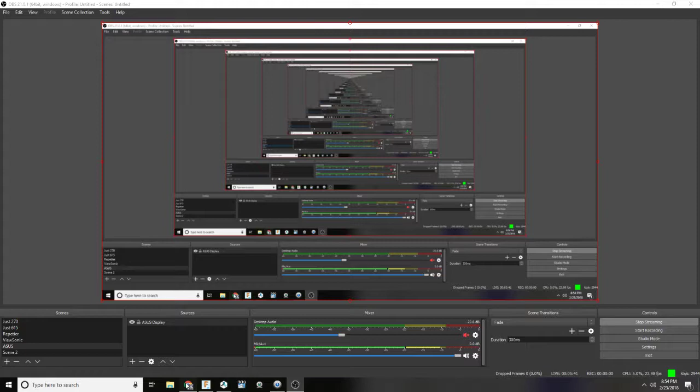So, time to go to Thingiverse. To do, where is it? That one place with the stuff and the things. And the things there. I'll do the ASUS. Oh wow, whoa no, yeah, oh trippy. Bam, okay, explore things.

We want keychain. Do do do, do do do.

Oh, piston, I like it. Oh, that's kind of cute too. And cool, and cool, and cool. Some interesting stuff. None of which... nerd.

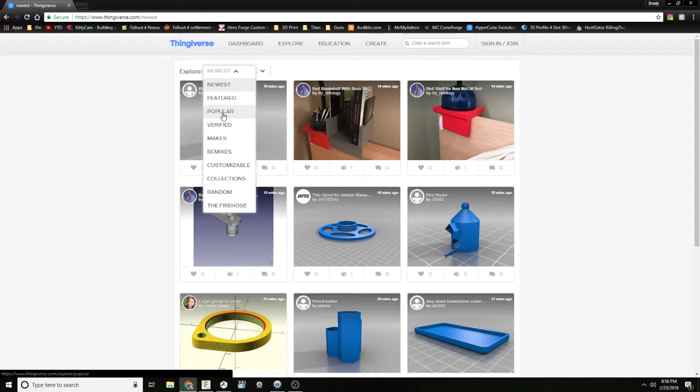Featured, no. Popular, yes. Is it the Proteus key holder? I believe it is. Yes, this is the stuff. Most definitely. I mean, I don't know about these keys specifically, but this'll do. That'll do.

Ba-da-ba-da-ba. So there, in here, that. Whoa. Whoopsie. Should have got more specifications.

Yeah. Let's extract. And well, take that. No, completely get it. And put it here. Then move down to the stuff, the things. Stuff getter is cool.

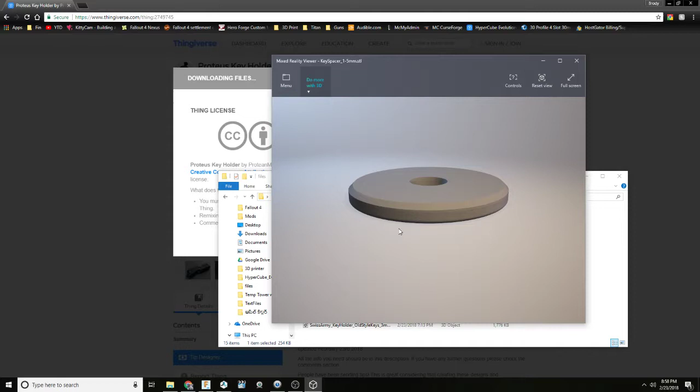And let's review. That is a spacer, hence the name spacer. Swiss Army key holder, old style. Let's see what else is going on here.

Oh. Oh, need to nix that. Disable input director. Go back to the cool bits. There's no kitty down here. And then.

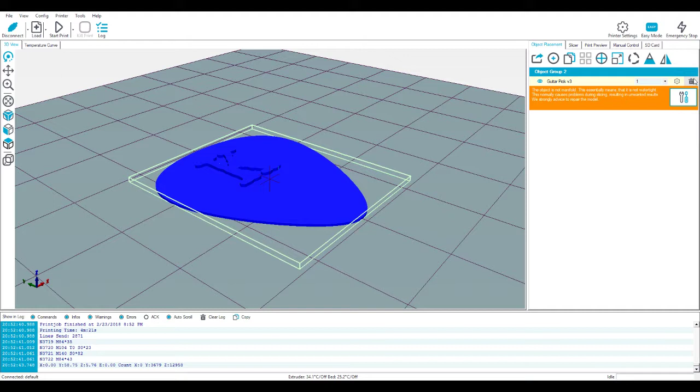So, now that we've downloaded the files, we need to place the files in the spot. Proteus key holder files.

Man. This is interesting. Top, large keyring, STL. Let's try actually perusing the files a bit.

Ooh, peruse mode. No name, thank you, okay. We don't need a spacer. Old style keys, nope, another spacer. Why do I even click?

Okay, bottom 2 mil bolt bottom knurl. Well no, I only have 3 mil, so it is what it is. It's got a little texture, pretty neat looking. I like it. The little dude, hey little dude, I'm going to print you.

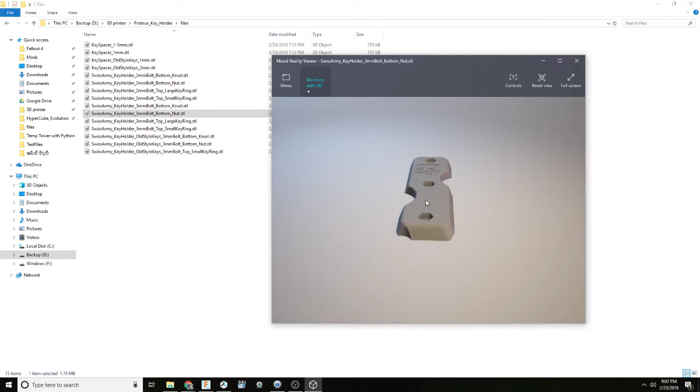Wait a minute, bottom nut. Okay, it's interesting that the part with the little dude is considered the bottom. That's not the smartest way to print this. Like, just print 2 tops and call it good. Like this, it's dumb, can't see what's going on, because of course they had to think too much about it.

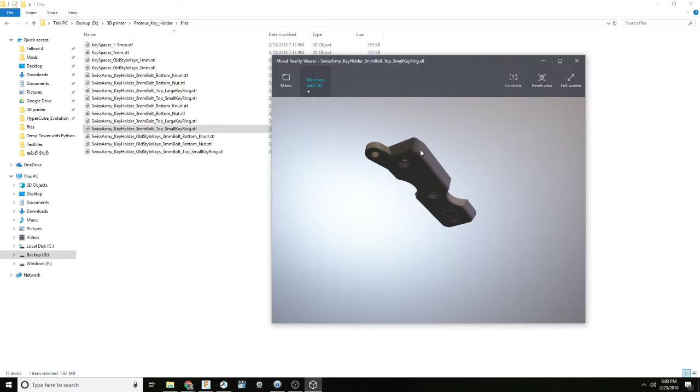So I'm going to go and flip that. Not quite sure. So I think we're just going to print the large style. Well let's see. There we go.

Back into the folder, back into the files, back into the 3mm knurl, and let's give you a friend. Whoa, large, based on assumptions, and that ain't bad. Let's see.

Let's see if we can just flip this one, or well it's gonna be twice, but the intelligent thing is to look here and see that this is the y-axis, and of course that is the axis I want to rotate on. Yay. We're going to delete you, because we want the file with the nut.

Are these two bottoms? These are two bottoms now. Okay, in that case we delete this one and add the other bit, which was top key large.

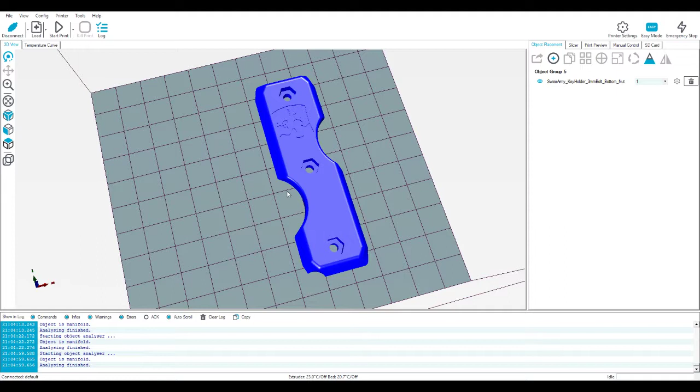Flip it along the Y. And I like that, it looks pretty good. Pretty good.

Slice it. Keel slicing, 1 hour 41 minutes.

Let's see here, I'm not viewing the chat like I should. It hurts to knock. I completely understand.

So, PK if you're watching, I don't think we discussed the part where I print this in, well, we'll just say you're getting this first one in semi-translucent purple, because that's what's ready. And that's what we're gonna do.

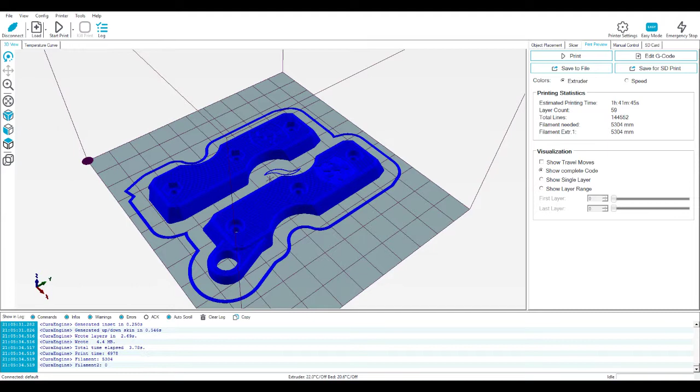Away we go. Everything look good here? I think so. Sliced in 1mm. Yeah, I got good feelings about this. I do.

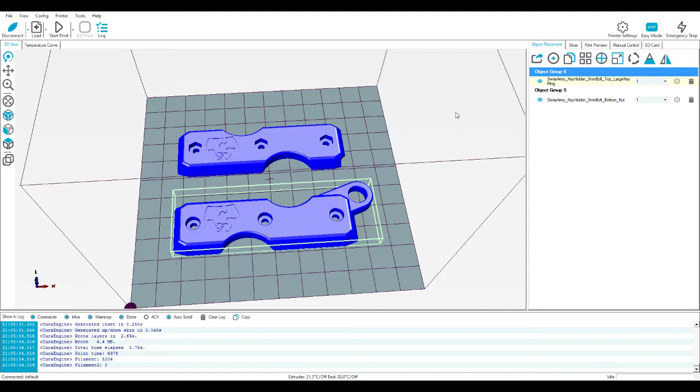We're going to do one thing though. I'm going to rotate these on Z. Do it. Yeah. Cool, alright, slice it one more time.

Infill, we don't need 40%, we're gonna cut that back to 20. That'll give us some better time too. Yeah, 127, that's a little better. Yep.

We are making the Proteus key thingy. Whoa, whoa. No, where'd you go? Whoa, yeah. This guy.

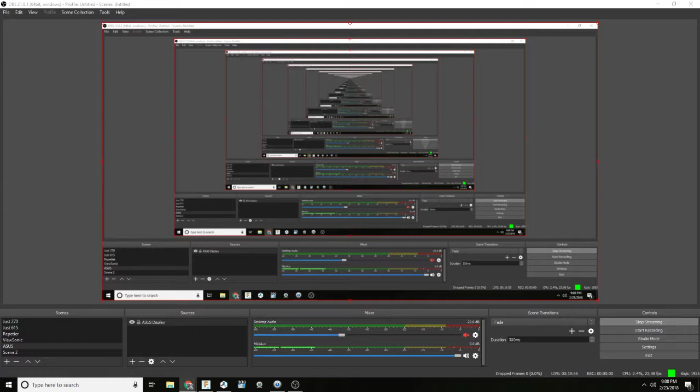Yeah, I think it looks pretty cool. I'll have to print a couple of these. I don't know if I'm going to print any keys. I like that they used the texture stuff, the lighting. Pretty crazy.

And back to the show. Oh.

Alright, bed is heating. Let's get a proper angle.

And some interesting dead space over there. And chat box. Screenception, absolutely.

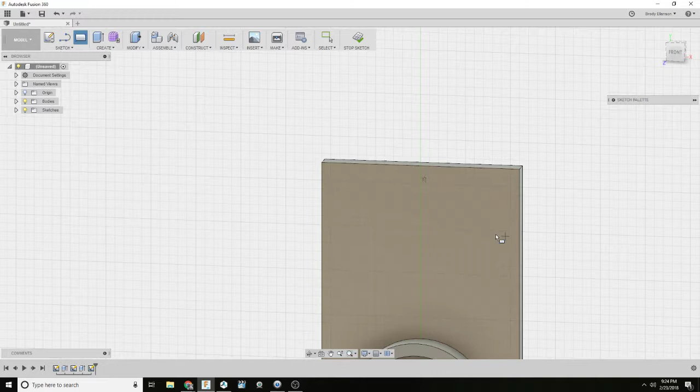And another rectangle, this time instead of going on a plane, we're going on a face. As Lars Christensen would say, you either have to be on a face or a plane. Yippers. So, what the heck, 22 by 5. Not 85, wow, not 8, 5.

And once again, we extrude. I'm gonna go 5, why not? I'm gonna go 7, why not? Yeah, that's the stuff.

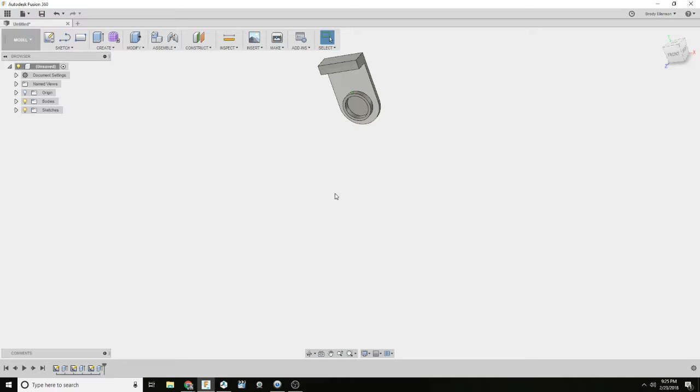And we're gonna go, whoa man. Whoa man. Whoa, okay. That was cool. I need to actually make this a little bigger, because yeah.

My intention is to put this inside a piece of PVC and glue it in place. I also want to give this a little something something.

So let us make a line using this face, and we're gonna go like so, and that's it. Now I'm gonna do this, I'm gonna push pull, I'm gonna go the wrong direction, and I want this to go to an object. I'm going to just select the opposite side, make sure it's cutting, click OK, and now I have this

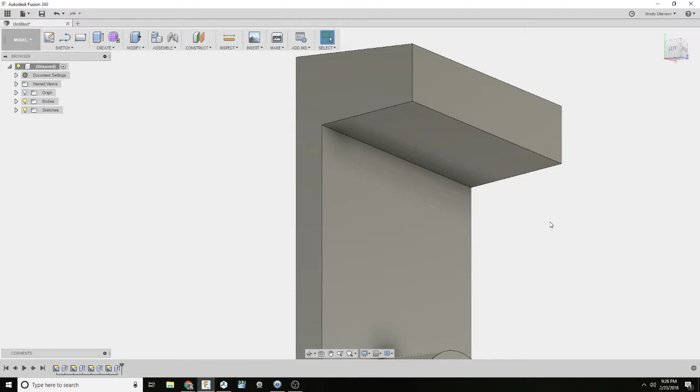cute little bevel, or whatever you want to call it. So happy, it's a happy part.

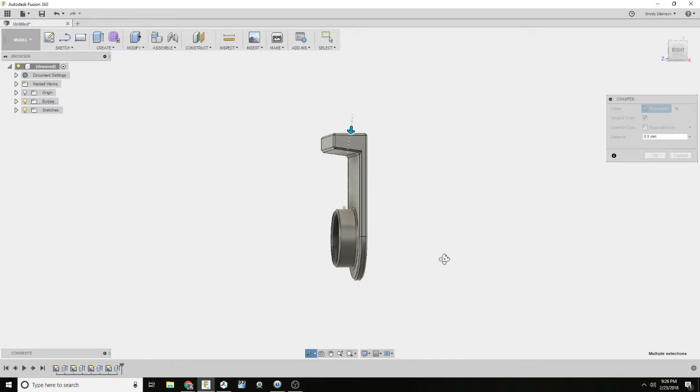Alright, now just for the insanity of it, we're going to select all this, and we are going to chamfer all of this by 1. Oh error, are you gonna error? You're gonna error, yeah, it doesn't like 1, it likes 0.5. And now that I'm thinking about it, I'm gonna cancel, because nobody's ever gonna see this, and I don't really give a whatchamadoodad about that part.

I do want, this will be seen, but it'll also be the bottom of the print.

So looking at the front, we're looking at how this is going to print on the Z axis, looking above. So when designing, always make sure that you're building towards Z. If you're using Fusion 360, you always want to do your initial pieces of the sketch on the Z plane.

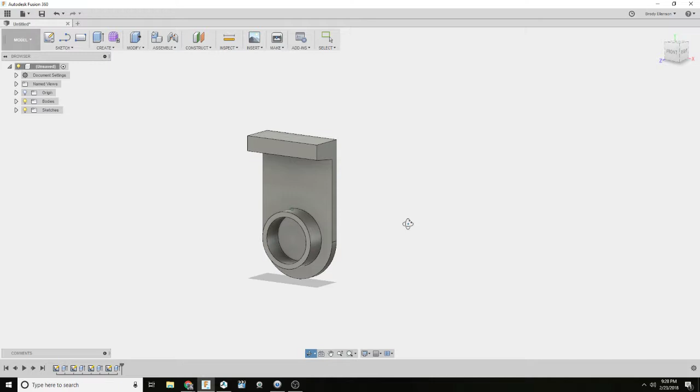Oh yes, I wonder if I can even say it. That's neat. Z plane, Z plane. I don't even remember what that's called. Something Island, for five points, what was the name of that show?

Anybody? Bueller? Somebody's got to be Googling something. It's going to be Google friendly. Fantasy Island, very good.

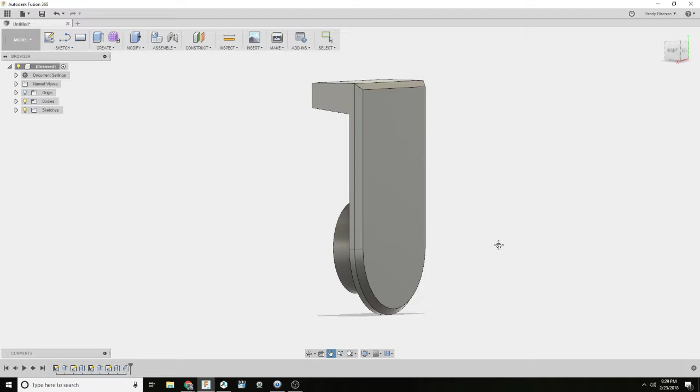You know, I made the mistake of watching that show a couple times as a kid. Whoa man, it's not good, not for children. I mean, not necessarily a bad show. Star Trek at the time had some gnarly bits to it too, but that's the original Star Trek I guess. But yeah.

So this is the end cap that will hold the piano in place, I'm thinking.

Fantasy Island. Yeah, yep. It's some crazy stuff, Fantasy Island was a weird thing. A weird thing.

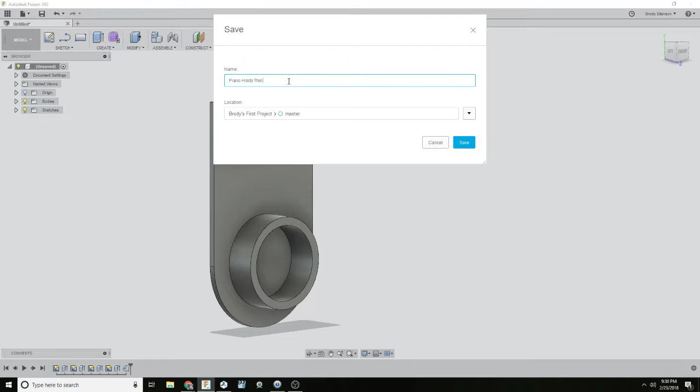Okay. No. Hold the thingy. And save it, make it. I don't want to do that. I do want to do that. And I do want to name it this. I do want to save it there.

And let's check back in on the print. Ooh, it is a print. Wah, wah, wah, and we have no cat. Oh, and we're on the wrong piece of the Repetier host. Why don't we go here so it's actually showing something interesting.

One hour and six minutes. Sounds like the hobbed bolt is skipping a little bit on the extruder, meaning our plastic feed is just a wee bit much. Or this filament might be a little soft actually.

Bump. Bump. Bump. Huh. Yeah, bouncing a little bit.

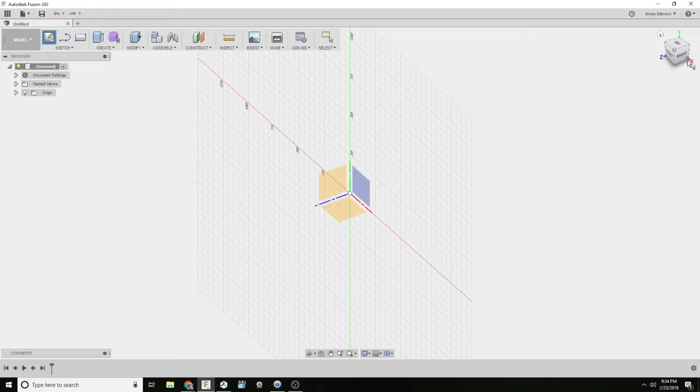So like I said, you want to start on the Z-axis, so you will always want to create a sketch on — now up here you see a reference in the blue line to the Z, a green line to the Y, and a red line to the X. So it's the same reference here. Okay, this being the Z plane.

So now this is our print bed. Let's... what? I don't know, let's make something for the sheer fun of making something. Possibilities are endless. We're in a slot.

I'm gonna do... yeah, I'm gonna do something mirror related. So let's do 12 by 6, why not? And so now with this, I was just able to type in 12 and it actually fit the dimensions there, so I guess I should have been explaining that.

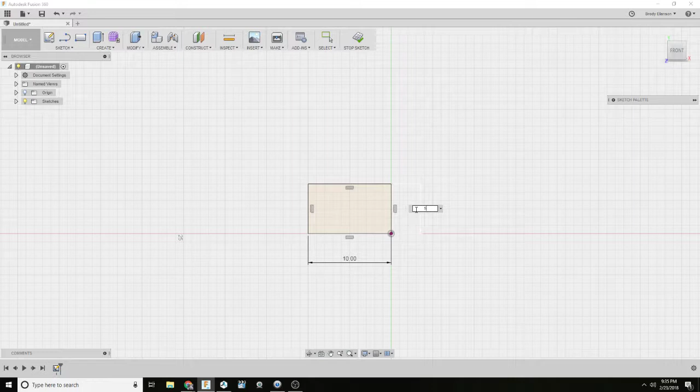If I wanted to change that now, I can just double click and, this is — I changed my mind, I want 10 by 5. So be it.

Now if I click this, it'll select the face and it goes blue, so you know the face is selected. You can right click on it and there's a couple options here. So press-pull almost always being an option, which is essentially the handy way of extruding.

Whoa. Oh yeah, sunglasses holder for the car. That would be good — I would need to measure the sunglasses though. But let's just assume some points here.

And with that, well, we'll start over. So create sketch, Z-plane. I want a rectangle — in this case I'm going to do a center rectangle. And let's see, yeah, we'll go actually 12 by 20 for this part.

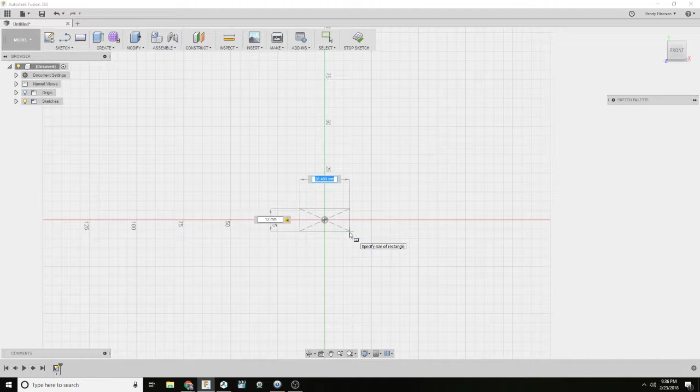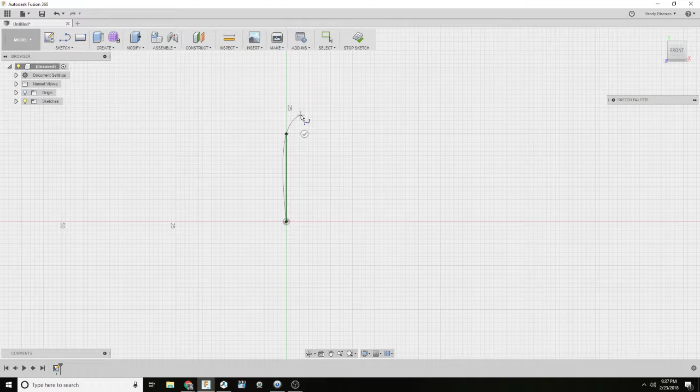that worked something like this. Actually, let's do the spline tool. Oh no, let's do the line tool — L for line, or click sketch, go to line, and all the hotkeys in here will be listed in the drop down. So line, once again, we will make this 30. Thank you, Angle Finder.

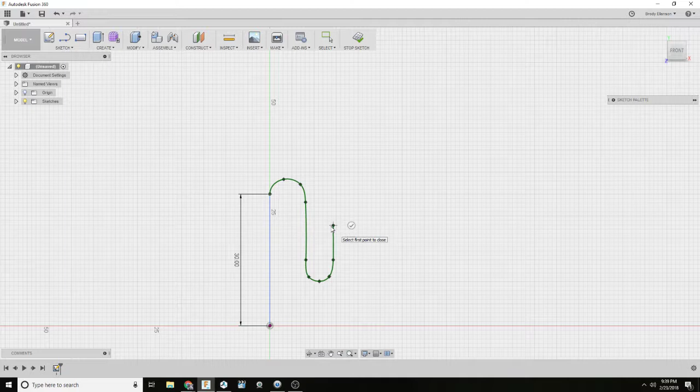So what she had really looked something like this. Yeah. And let's see if I can remember how to do this.

There's a way to go through and use that line in order to create a sweep. Profile, path — I can at least pick the path. Profile, I didn't have anything selected, so let's make one.

Let's make front, there we go. Rectangle, 1 by 1. And then get really close, press Q, and we'll make it 5.

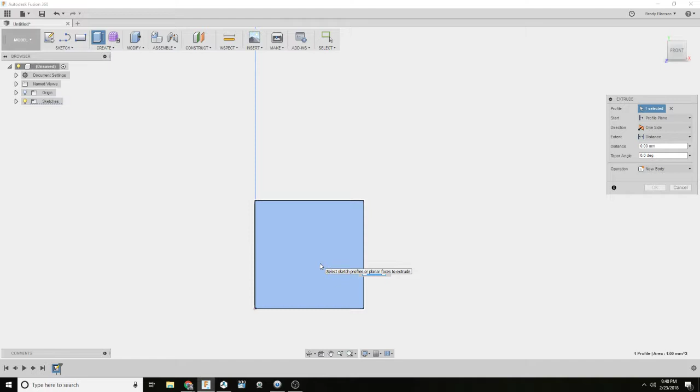And then we will edit the sketch again. Will this work? Do you remember how to do it? Sweep. Why not, why not? Yeah, the profile is not going to work. Dang it. One moment.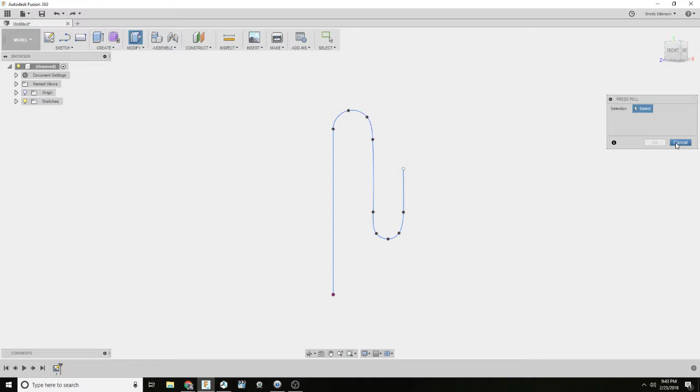So let's go back a bit. Undo, undo, undo, undo. Oh, this is gonna work. Doesn't want me to move a line. I don't actually have a body to work with. Can we copy? Probably not. Nope, I don't need you. Nope, negative.

I don't know how to make a sunglasses holder. If I had to do it again, I'd do something like this.

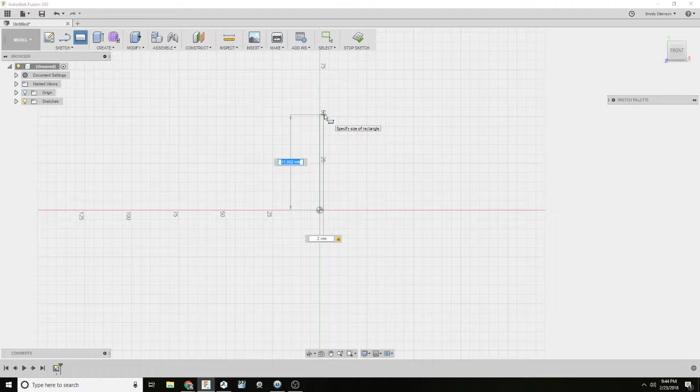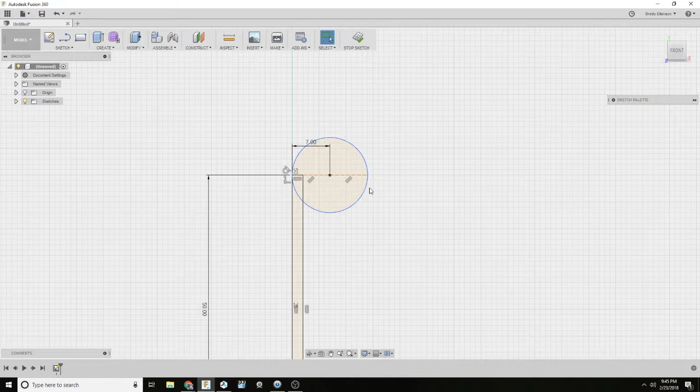Front, create sketch, Z-plane, rectangle, 2 by 50. I'd zoom a little, I'd make a circle. Actually no, I'd make a line, a construction line from the end. I'd make sure that goes 7, why not? I'd push X to make it a construction - I'd select it first, then push X to make it a construction line. I'd push C to make a circle, and go ahead and make that circle go there, and since I don't want it to be a construction circle, I select it and push X. Then we're gonna make another line from here to there, and go ahead and rectangle by pushing R, and bring it down - yeah, we'll go 2 by 25.

And once again, we don't want it to be - oh no, let's Control Z, and push R. Nope, dang it, 2 by 25. Select those guys, do that. This one doesn't really matter up here. The line from the inside arc, go 7 again, make it a construction line. It looks weird, but it's good. Do that, push escape, select the circle, push X to make it not that.

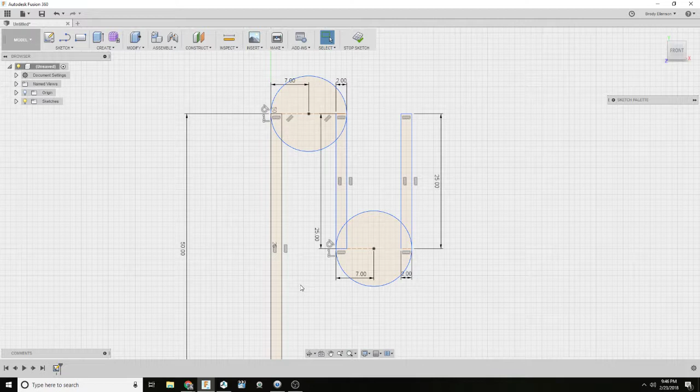Maybe this last bit we can just freehand, because why not? We'll go, yeah, 25 by 2. Yep, yep, yep. Oh my. We'll do that.

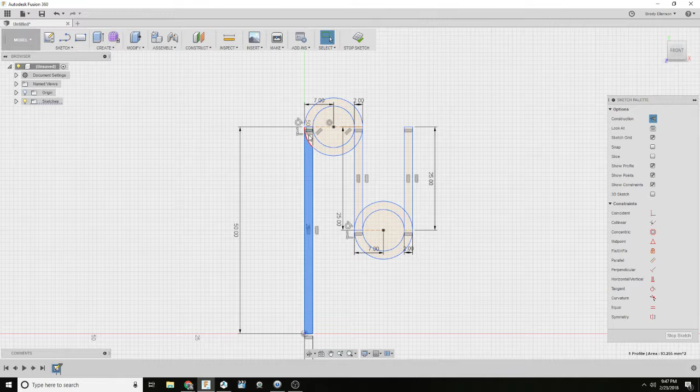Actually, I don't know how I got locked into this whole construction thing. I know there's a way to deselect the option, but I know now that I want to select a series of points that I want to extrude. Go push Q, and we'll just make them 5. It's not a needed sunglasses holder, but it's similar to something else found on Thingiverse.

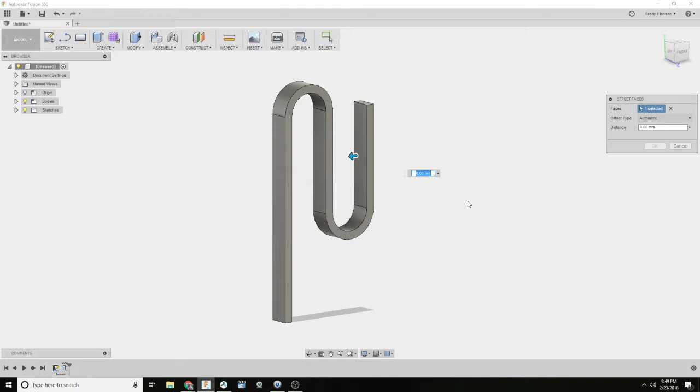Okay, so what's nice about this, I guess, is that it's fairly universal. I'm not advanced enough to figure out specifically how to tweak it. I mean right now it's - well, actually, let's try something. Yeah, it's seeing other pieces and assuming the cuts based on what was previously there. And I still have much to learn.

Let's check on the print for just a moment. Coming along pretty nice, 48 minutes left. We're an hour into the stream.

Whoa. Okay. So the problem with the glasses holder is, sure, you can put something in here, and if it were a little wider, not so bad, but it's not the best. I guess it's a decent universal for putting on your visor. Kind of upside down in the design that way, but yeah, this part would be what would hook to the visor, and this would hold your sunglasses.

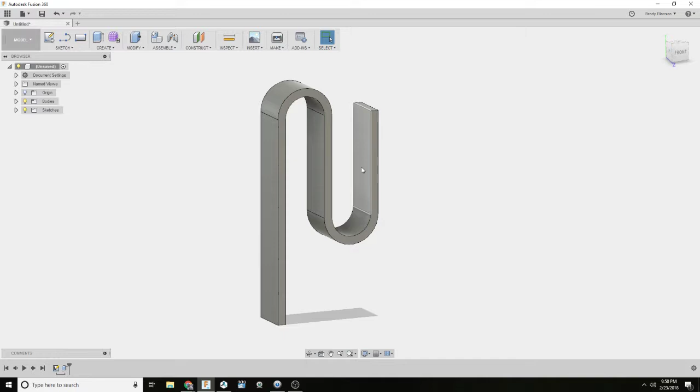I think I would not do that. So this would be difficult. So we're at a point here where we're sketching on this face, but not really able to - yeah, this isn't going to work. So what I'm thinking is adding an arc and moving this out, but working on that face isn't going to help. So I'm going to cancel this. I'm actually going to delete this sketch. Go back, stop sketch. There we go.

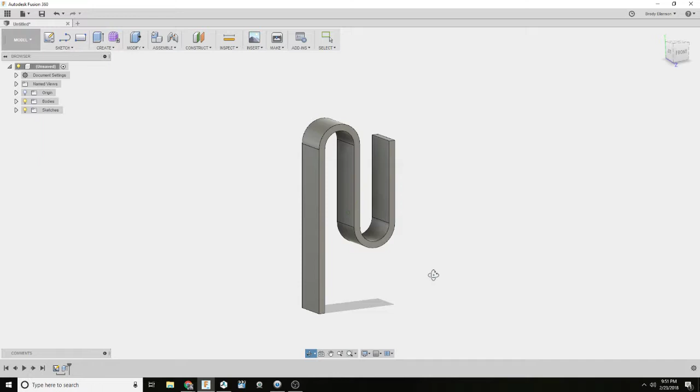Go back, delete. Alright, so we need to actually put this on a plane. In this case, we are going to be operating, well, once again, on the Z-plane. Okay, and just to give it that arc, I'm going to select here and here, the 25 mark, and that wasn't even remotely right.

I don't know what I'm doing, man. Oh, something. Wow. Not much of a lesson when I'm just learning here as I go. I'll try one more. Okay, select the start point, end point, and then point on the arc. Yeah. That's what I thought I was doing.

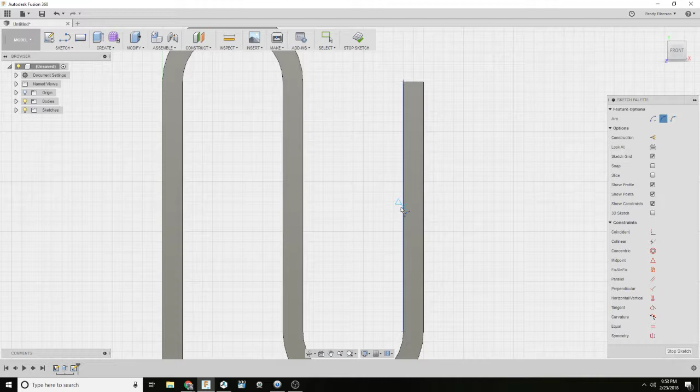There we go, much happier. Yeah, we'll assume this is a 5er. And we'll do that one more time.

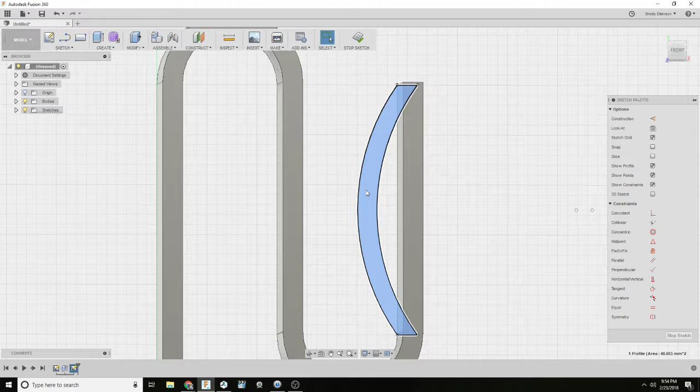And it's blue, so it's not tied to anything. We need to finish closing it off. And like that, you now have a face. Yay for faces. So I'm going to select this face, push Q, and give it some of that. Let's change that a bit, make it a join. Okie dokie, and at least now we have a little bit of a slot.

If I had to do it over again, I would have just planned for the slot. But it is what it is. Now we have these little gnarly edges here. We want to fix that.

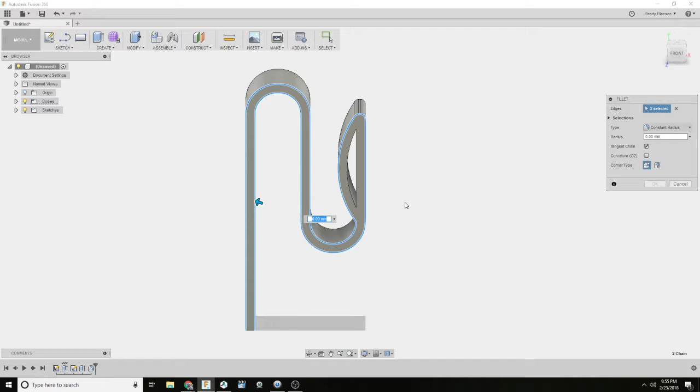So let's go ahead and fillet, and we'll select those two. A fillet will give it a round edge. It's kind of neat in that if I push F to fillet, anything that's a consecutive line will select the whole piece of it. So now if I fillet this, that whole point is rounded.

And the only part that didn't fillet was these 2 points, so I can control click those, push F, push 1. Oh wait, no, not happy. It's not happy because of these little sharp buggers. So even if I did something, oh, it made me a liar.

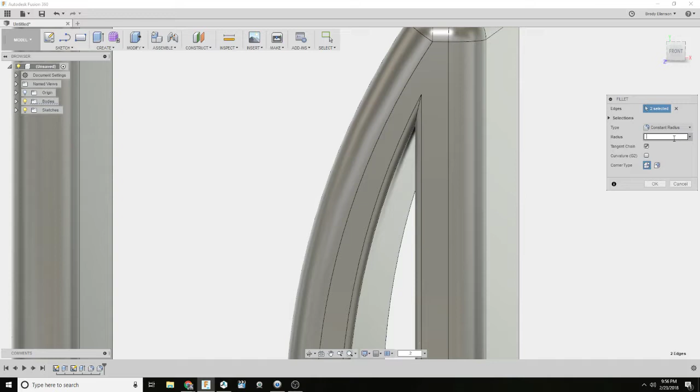0.5, let's see if we can get away with that. Yeah, it didn't look too bad. It is what it is. Okay, so I'll just cheat the system.

And I'll say I want all these people. Nope, we'll push F first, and then we'll say I just want all these people. But I know I don't want you, and I don't want you, and I don't want you. So what's cool is I didn't actually have to push control or anything. It just allows you to select things through the body.

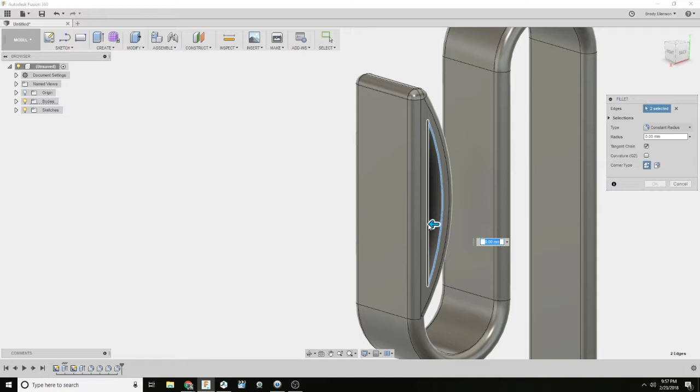We know that this is a different size, so we need to deselect those two and assume again. We'll select—actually I will start by pushing F to go into fillet mode, and I will select these two, and I don't have to control click or anything. And now we have a very symmetrical hoobie doobie.

And if I wanted to see the planes, I would just click on origin. If I want to see through the body for any reason, I can deselect it. Timeline is interesting—pretty awesome actually. You can step back through all the things that you've done.

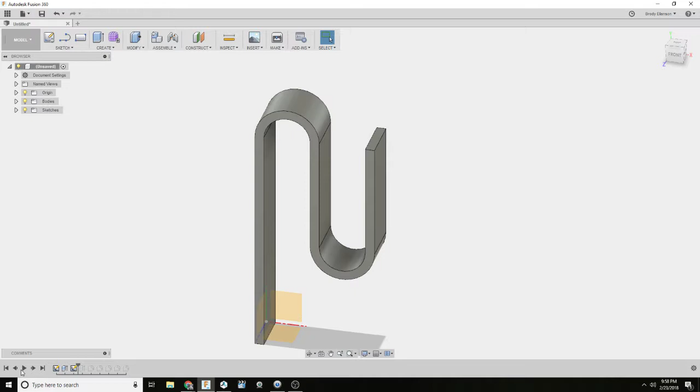So if I needed to, say—so this is a sketch, it's a point in the sketch, so this is where everything was made. The initial sketch had all the parts for the first expansion. No, what's the word I'm looking for? Extrusion. Man, oh man.

So these little lines right here tell me that I'm trying to modify something at that point, and it changes based on that. I didn't do anything, I just went to the end of the sketch history.

But if I wanted to—let's see, if I wanted to, I could edit sketch and I can get rid of that. Actually, no, we don't want to get rid of it, we just want to...

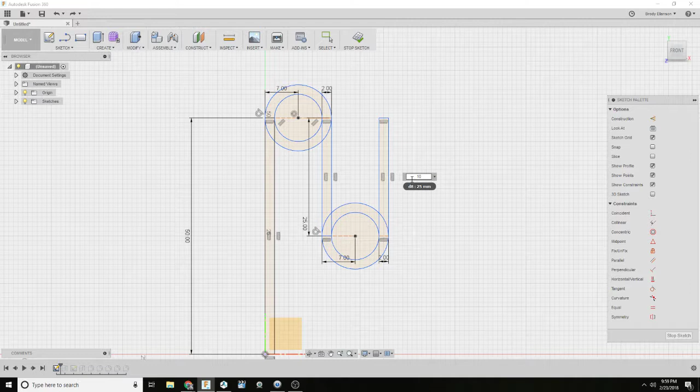Should have thought a little bit more about this before I started. Let's change this to 10 and see if that connects to the other piece in the future. Okay, and because the other parts of that were based on the points previously measured, that's why this cut down.

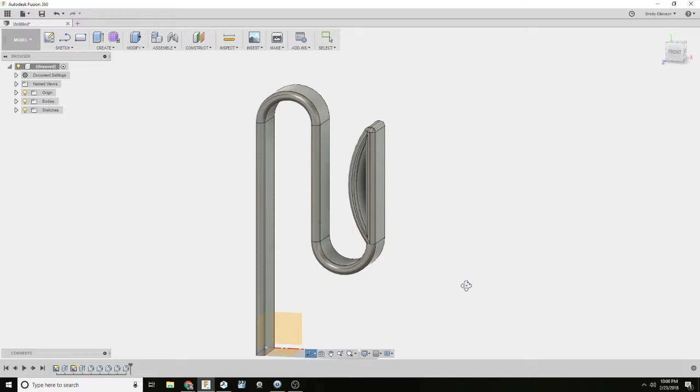So, yeah. We'll just undo. And that'll have to do. I guess if I wanted to, I could just cut this out too.

And back to the print. Hey now. Back to the print. Is not looking too bad. I like it.

Okay, sorry about that.

I wonder if I need... I mean, I could slow down the feed rate. No, that would slow down the whole print. I'm missing something, I need to go back through and reload the firmware. Need to reload the firmware.

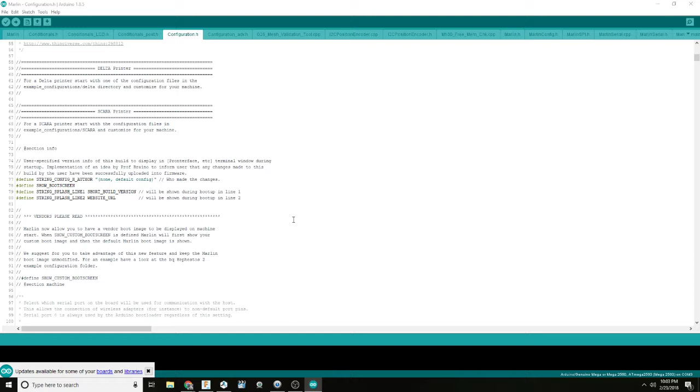I know Octoprint doesn't have anything. There are a number of others. Oh my gosh, Astroprint has its own firmware. There's a handful of others that I've tried, and for some reason I've been sick all week, so I'm drawing a blank, brain fog. So the motherboard was defined at this point in the configuration.h.

Told it to one extruder, default filament size 1.75. Not really so much with the switching extruder, nozzle, steppers, power supply.

So this might be an option, the ramps board, the Arduino is receiving 5 volts USB power, so I could actually have it engage a relay to start the power supply, which might not be a bad idea because the cooling fan for the hot end is always on when the power supply is on.

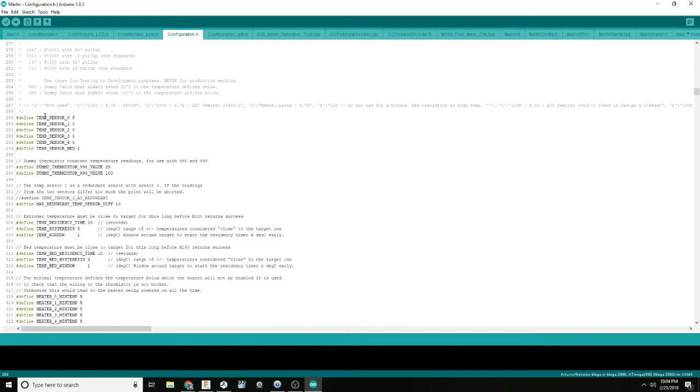I only have one temp sensor for the hot end and one for the bed, the type of which is 100K for both, which is a very standard thermistor.

My PID loop. This takes care of the heating for the hot end, and then there is another PID loop for the bed. Dialing these in is very essential to getting the fastest possible heating time without actually causing damage. There are ways to use G-code to have that auto-tune for the PID.

These axis steps are critical. Very, very, very critical. This is everything right here. I got lucky that my steppers are actually fairly balanced - 62.62 is kind of crazy that both X and Y came that close. So Z, this is the amount of steps per millimeter that the two Z-axis stepper motors have to do, and then the extruder, that's how much filament.

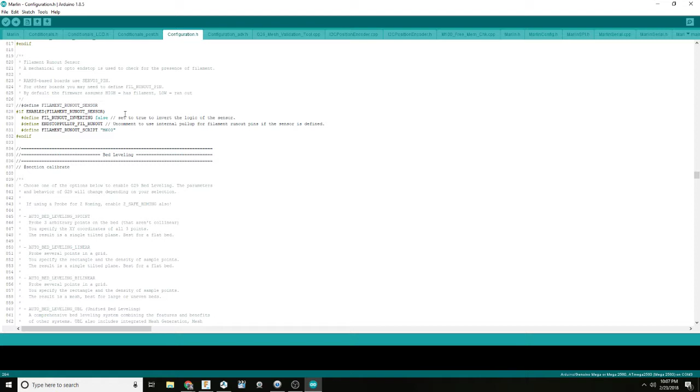Don't have a runout sensor. What this would be is a switch, like a roller switch that would be on the filament itself. And if the switch dialed to the point that you ran out of filament, it would open the signal and stop printing essentially.

Auto bed leveling, I haven't had much luck yet. I do have a sensor that I've yet to install. When I do, I believe that I will just be using linear bed leveling.

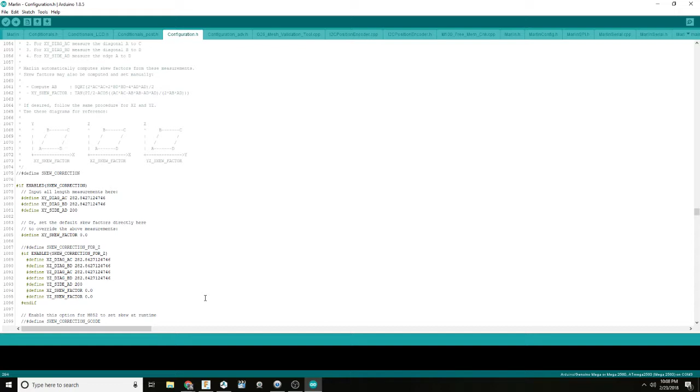This just goes through and talks about each type. Skew correction, I haven't had too many issues with.

EEPROM, this is important stuff here. If you disable M503, you can't extract information like the steps per millimeter back from the EEPROM. So where it could save you a little bit of memory for getting your printer set up in the first place, you want to leave this disabled, or make sure that it's commented out so that it's not defined.

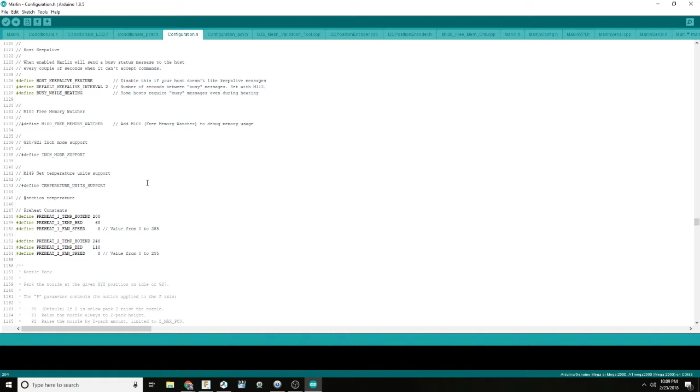Inch mode support - if you're really hung up about not using metric for things, you can define inch mode support. I don't suggest it, just everything in the community is done in metric. These are all Celsius temperatures. It just is what it is. It's making me appreciate metric more and more.

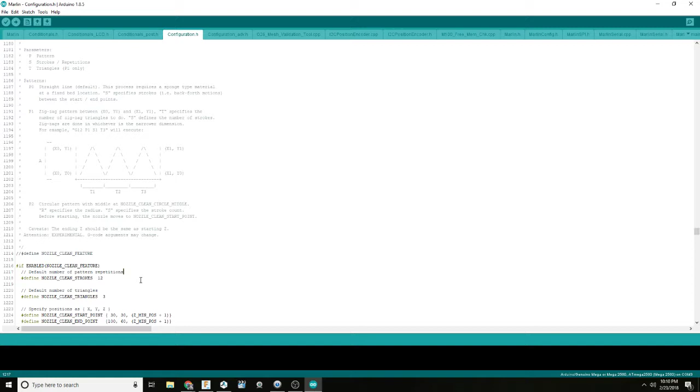I have really stopped thinking about things in 1/16 of an inch as much. And for all the time I spent as a mechanic, that's kind of crazy - like I always had a 9/16 wrench with me all the time.

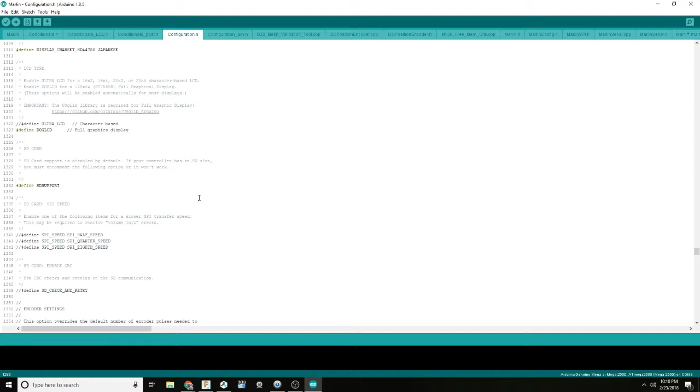LCD, so this can be some tricky stuff depending on what you have. A lot of the Ramps 1.4 boards run - let's see, where is it - you want the DOGLCD for sure. And where in the heck is it? Yeah, the RepRap Discount Full Graphics Smart Controller.

That is a generic name for pretty much all of these, well it's more like 30 by 70 mil LCD screens that allow you to do some interface, or allow you to interface manually with your printer, which is pretty nice.

And the stuff up here would allow you to - there is a dial that's also a button - this allows you to tweak that to what you feel is best. I haven't done anything with the speaker, so I don't know why I have that defined.

That's essentially the bulk of what you need to modify in the firmware. This library is just LED stuff. There are some SD card things somewhere in here.

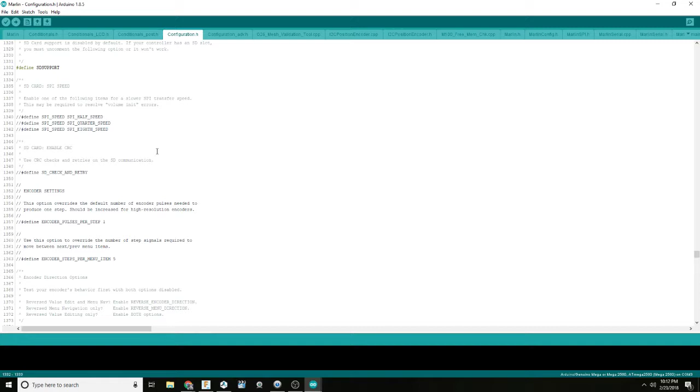There we go - you absolutely want to make sure that this is defined if you were planning to use your SD card. And for me, it wasn't defined by default. I don't know why.

So that was that. Don't save.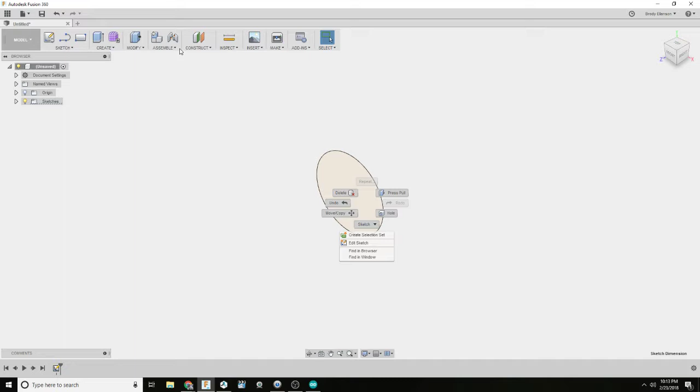I'm going to do something a little different here. Stop sketch, I just needed that as a reference. Now I want to create an offset plane, so we'll make this go a little higher.

Now the rules are that you can only create a sketch on a face or a plane. So here I'm going to create a sketch on the offset plane. I'm going to make a circle, we'll make it 80.

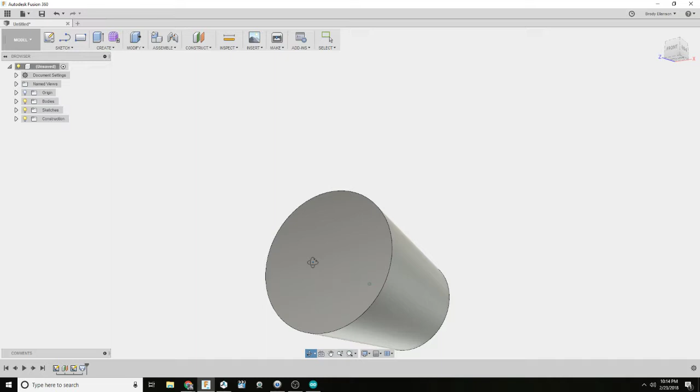Now I want to loft here to here. Okay, so this is essentially the outside of our cup.

Now to repeat this process, I'm going to offset plane, go up 5. I'm going to create a sketch on the offset plane, which will be a circle. We'll go 40 - I think this is pretty thick.

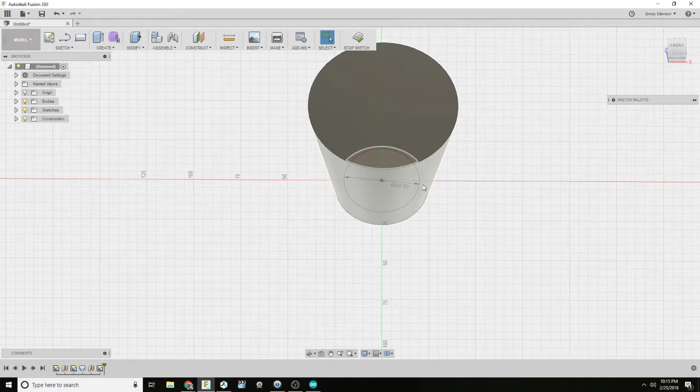And one more sketch, and another circle. What were we, 80? So we'll go 70. Okay, and we will create again, we will loft, we will select - oh haha, alright, cancel. See, it defaulted to the offset plane and not the face.

So I am going to Control Z that. Going to select this, and then I'm going to make the sketch. And still not there. Huh. Interesting.

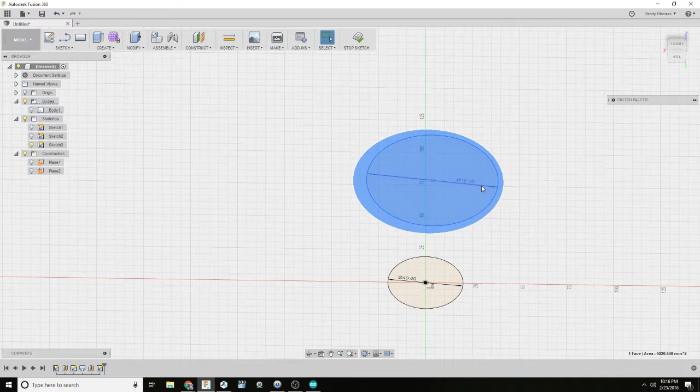70. We want to move. Yep, still on the plane. Dang it. Stop it. How am I doing wrong? Absolutely not cool. Yep, still not cool.

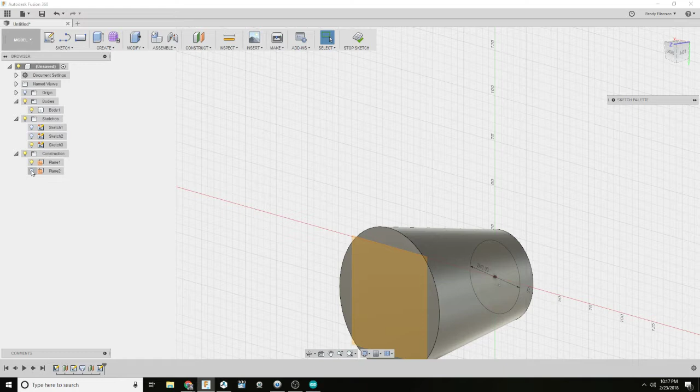Okay, now we want to loft this, create loft, do this. Wait a minute, create loft, you to you. Okay, hey, we got a cup.

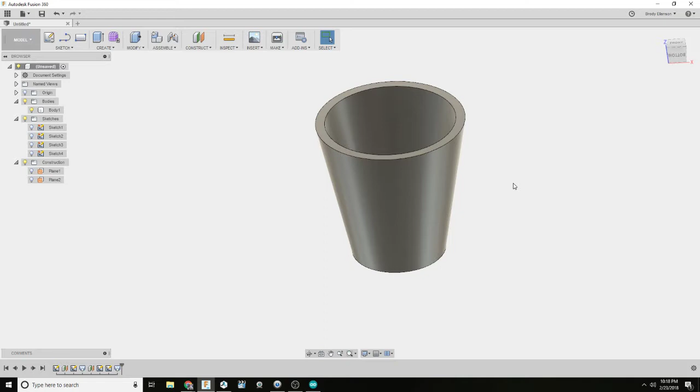And this will print this direction, so we don't want to hurt our poor lips, so let's fillet it. A little more fillet - 0.5, oh too much, 0.2, 0.3, no, 0.4, 0.5 - we're just going to accept that. And that's a cup.

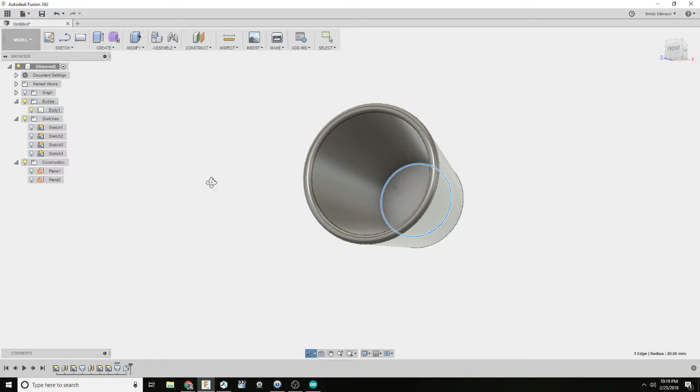Yeah, we're gonna do something, one of those neat little additive manufacturing things - we're gonna fillet it 2.5. So now, too close. Now it's smooth inside as well.

Alright, save the eye cup, and copy that, save it, make it eye cup, and that is that.

Printing, 20 minutes left, 1 hour 30 into the thingamadoodle live stream. Yeah, live stream. Not too shabby.

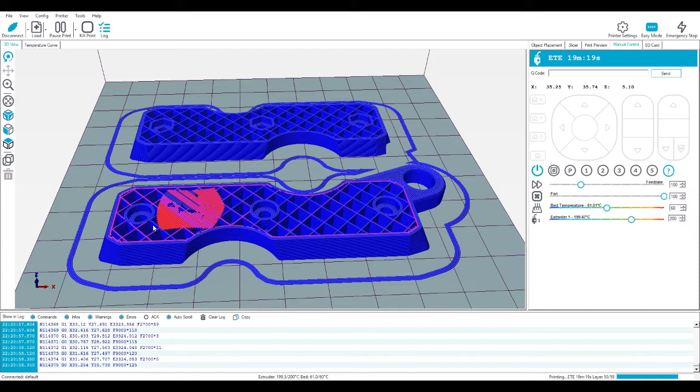Going to Repetier, so don't have to worry about that because it's already assigned the print. The print's being fed, so I can actually do whatever with object placement. So yeah, not a bad cup.

Yeah, this is something I would want a little bit more infill density, quite a bit more actually. And I don't care if the first one's pretty - I'll just slice it at 0.4 mil, which is good for seeing if it's really good for - what am I trying to say - the recursive design process. But where this is a cup, I just really want it to hold liquid, so watertight's the biggest thing here. So might print it a little bit warmer.

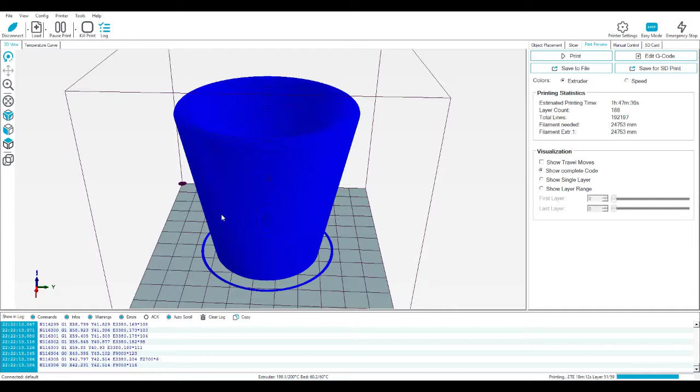Not bad. The cup. Ooh, the cup. Locked in. Home, there we go.

So I need my extruder back up to temp - don't need the bed temperature, but you want to definitely be. My extruder protection is set at 170 degrees, so the stepper motor that moves the plastic into the hot end via the Bowden tube won't operate until this number shows 170 Celsius. However, after about 100 Celsius, you can feed it by hand or retract it by hand. Right now, I'm going to retract it, let the hot end finish heating up, and then I'm going to manually feed some filament.

Yeah, my nozzle is definitely jammed up. Bummer. Such is the joy of 3D printing.